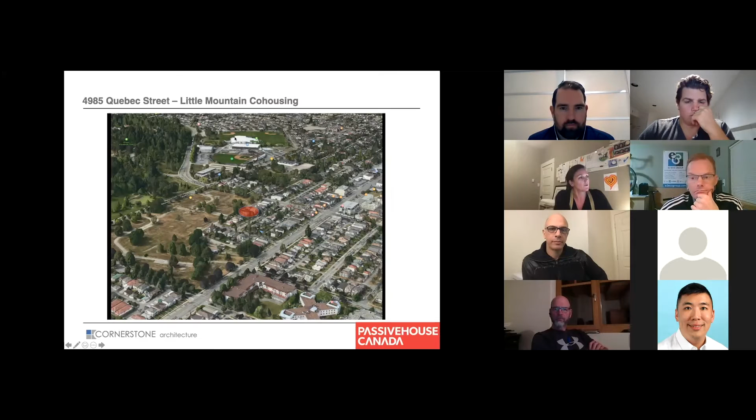Co-housing project. So Little Mountain co-housing is a passive house project, obviously 25 suites, large amenity spaces, a guest suite, and common workspace. Location in Vancouver is in the Little Mountain area, right there. Can you guys see my mouse? Okay, so you've got Main Street here, this is 33rd, and Quebec Street is right here. This is the Hillcrest Community Center, this is Queen Elizabeth Park. So that's the location.

So in terms of design, a few things influenced the design. I should probably say at this point that I cannot take credit for the actual design of the building. That was Scott Kennedy and Simon Richards from Cornerstone. They designed the building. I came in prior to stage two to, as I jokingly say, make this building a passive house, which is not entirely true.

Anyway, it's a co-housing project, which is not to be confused with co-op housing. Co-housing means you have owners that form the development company, and then they hire the consultants, architects, and the project manager to channel all, in this case, 25 owners, 50 people's wishes to build their own home. The other interesting part was, as we always know, design guidelines by the City of Vancouver don't always help the case of passive house. Setback requirements are not always helping, whereas we try to develop a compact building.

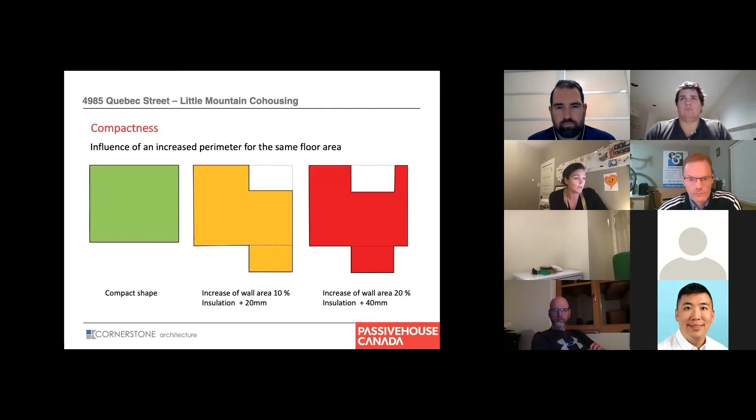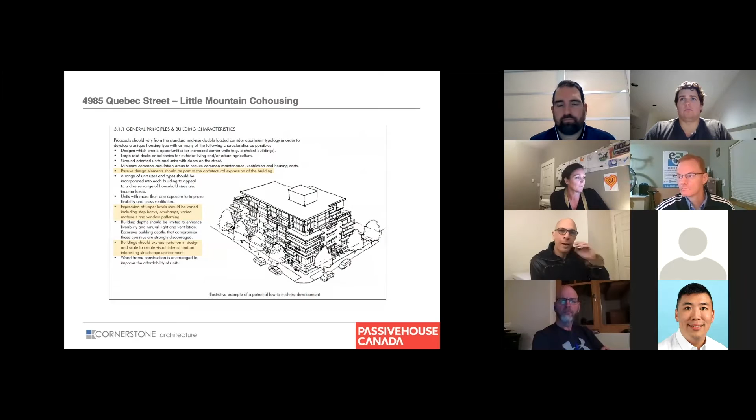So we've all seen this slide, so I'm not gonna talk too much about it, but it is somewhat important as we go further through the design process. We know as we go away from compactness, our building has more heat loss area in comparison to the floor area. Then there are rezoning policies. This entire Little Mountain area was rezoned to 6-story multi-residential buildings in wood frame construction to make it affordable. And then the typical design guidelines. The city called it the Main Street Character Design Guidelines, whatever that exactly means, but they're asking for setbacks and these kind of things.

So here's the site, schematic design site, building envelope. Let's go through this a bit quicker. And then we had the first concept section. Zoning asked for the units facing Quebec Street to have exterior access, so access to the street. So there was basically the idea of having townhouses on the bottom.

And what you always find in co-housing projects, as it is a community of people that comes together first, is they actually want common areas. They want areas where they can spend time together, but also have their own units. So every co-housing project has a so-called common house, which is a larger amenity space with a larger kitchen, not a commercial grade kitchen, but a big kitchen where they can all gather together. And we'll see later in the floor plans that there are other communal spaces in this building.

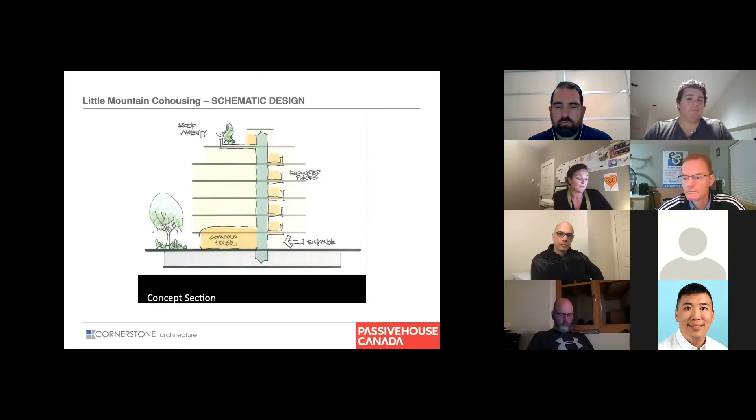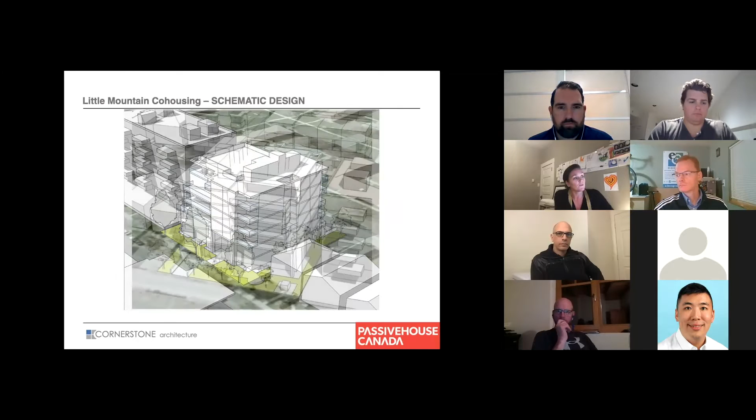So compact, 6 stories. So this was it. So from what I understood, there were two designs. Initially the design was fairly compact with a few setbacks here and there, which had to happen. But then, and this is from the back, there was this very strong wish by the community, and I'm going through this quicker, to actually create a communal backyard where as many units as possible have a visual connection to that area, right?

And so this is now the view from the lane. This was the view from the front. This is Quebec Street, view from the lane. And this is basically the way the building looks right now. This was still schematic design, but what we have here is a U-shaped building. So we did add quite a lot of heat loss surface, to speak in passive house terms, to make this desired building shape, which is working really well.

So you can see here, we have an exterior staircase, which you will see later, but we also have these exterior pathways on every single level. And those, including the balconies, allow this visual connection to this backyard. And down here, we've got this amenity room spilling out into the garden. Here's a kid's playroom going into the garden.

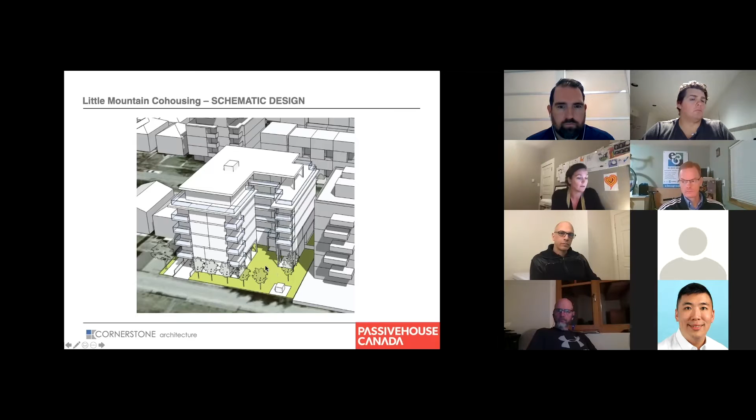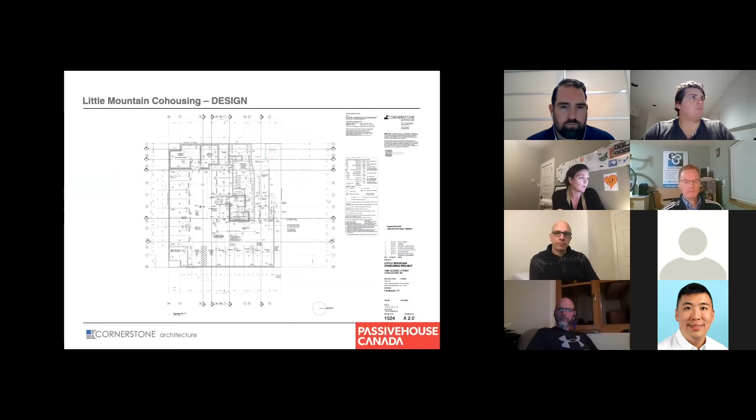So now this was the start of the schematic design. And this is how the building actually looks. So you can see here, that's the courtyard with the exterior staircase. I've got some floor plans that show that a bit better. So that's a site plan, not really important at this point. Parkade, obviously there's underground parking, which actually has a music room and a bike room in there also, different from normal developments, like a bike repair room. It's a workshop.

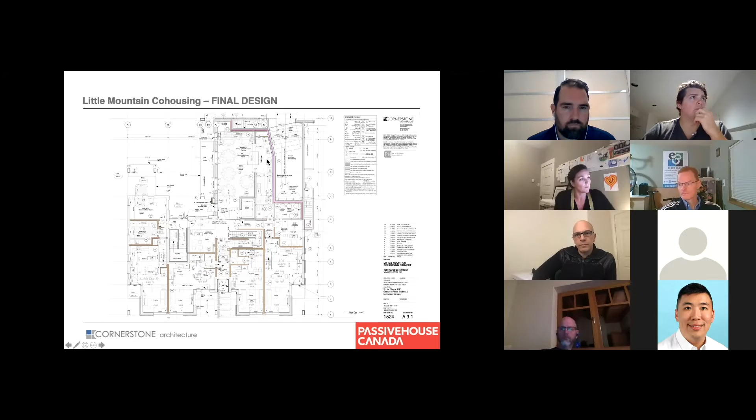And so now this is the main floor plan. You can see here, I hope it's visible or legible. This is the parkade entry. This is Quebec Street. So here's the main entry. You go in here, and then this is the very, very large amenity space with the large amenity kitchen, right? There is a communal washroom down here, mechanical, elevator, but then there is another amenity lounge. So this whole downstairs area is all communal, and this one goes out straight into this big garden area. Then you go through here, and this is our exterior staircase, right? So that goes all the way up to the roof deck.

And then you go back in here, and there's a communal laundry room. Even though all the units have their own in-suite laundry, they still wanted communal laundry as another option. And this is the children's playroom, again, with direct access to the outside here. These four ones here in the front, those are the four townhouses. They all have an entry from the street. And those are the only two units in this development that are actually 2 stories.

So as you go up, you can see here, these are the townhouses up here. This is a 1-bedroom suite. These are two 2-bedroom units. And I believe those ones are actually the only ones that are stacked all the way up. Everything else changes on every floor, somewhat slightly, but still it changes. So we have 25 units and 13 different layouts.

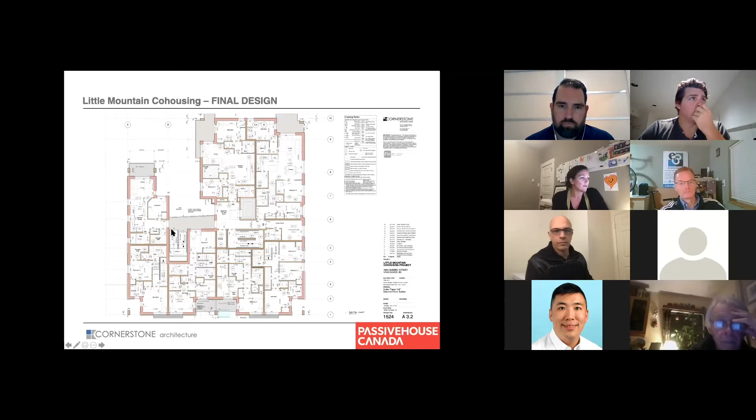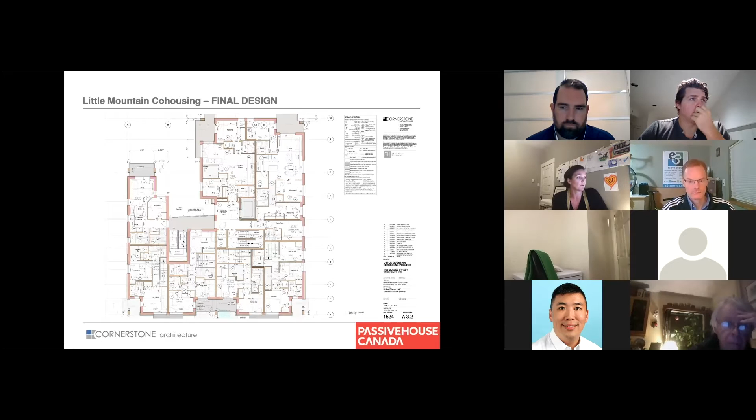Here you can see that exterior staircase and those connecting pathways on the exterior. So on one side, they enter into a unit, and on the other side, they actually enter into this hallway that then enters into the units on every single floor. So I go up, up, up. And this is where we're getting to the 6th level, where we have our setbacks, big open roof decks, another fairly large common room up here, so another amenity space.

Actually, I forgot to mention, on the lower levels down here, there is one space which is a guest suite that can be used by anyone who has guests over, with its own bathroom. And then on another level, there is another common room, which is a common workspace.

And this is the roof deck with garden beds. So the elevator goes all the way up, the staircases both go all the way up. So this staircase is actually entirely exterior. This one does not go down into the parkade, this one does, and so does the elevator. So this is basically the design of the building.

Now, what this did, and we need to emphasize that: you can see that the heat loss form factor on this building is 1.72, whereas a building like, let's say, the Heights, which is at Skeena, Cornerstone's first passive house building in Vancouver, probably the first passive house building in Vancouver in multi-residential, has a form factor of 1.12, which is fairly compact.

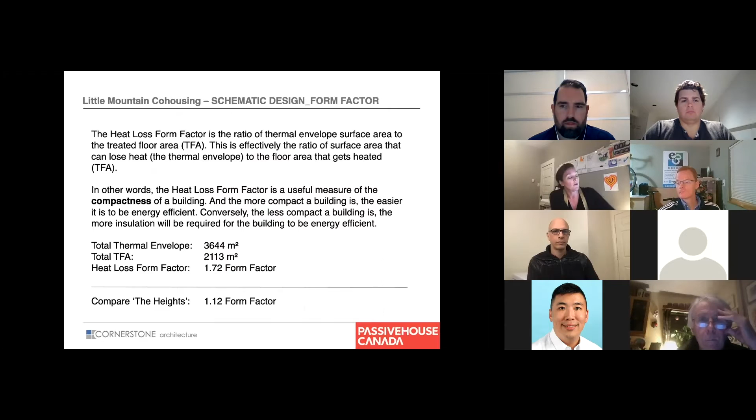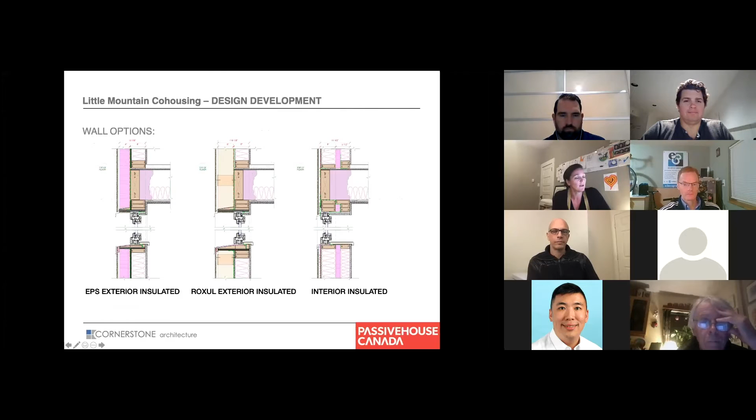So as we know, design of a continuous air barrier is a large challenge. So we looked at different wall types, and we basically looked at this and this, and this one is not ideal in building science terms. This one was too costly with the rock wool on the exterior, which right now we're looking at again for a different project, because lumber prices are so high that this one might actually be less expensive than the chosen one that we used for Little Mountain, which is this one. It is what we used on the Heights. But because of the form factor being different, the EPS layer had to be 1 inch thicker, which is quite a bit for the entire building.

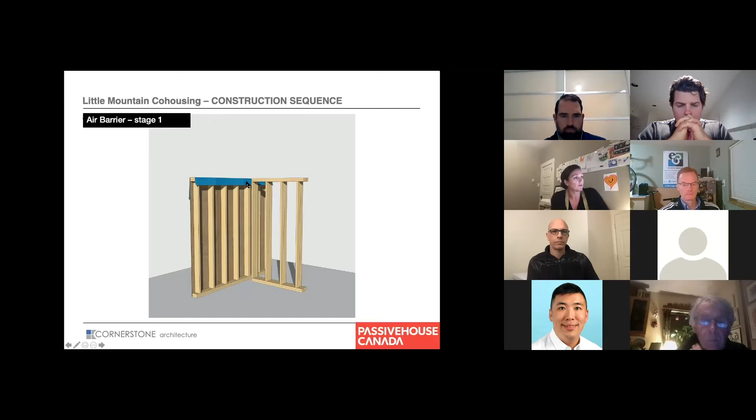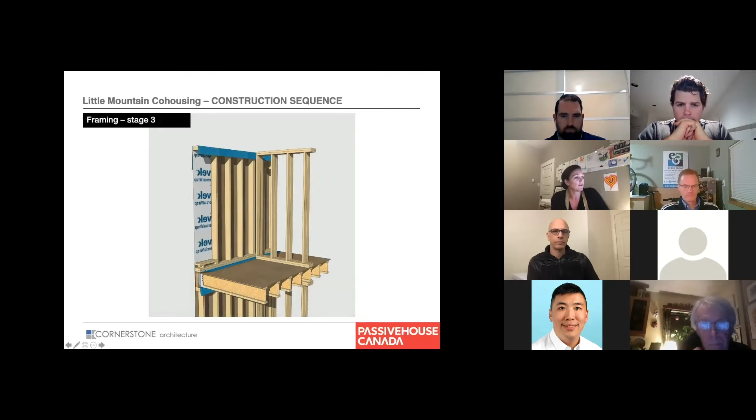Now this is the sequence. You can see here, exterior wall, interior wall. We left this part open when we put it together because we had to fill this in after, right? So that's how it was put together. Then there's the exterior, the membrane, we call that the floppy bit, the Tyvek that needs to go on first so we can wrap it around after, right? So here it comes up, and then there's the next one. Pretty straightforward building assembly. The windows came in.

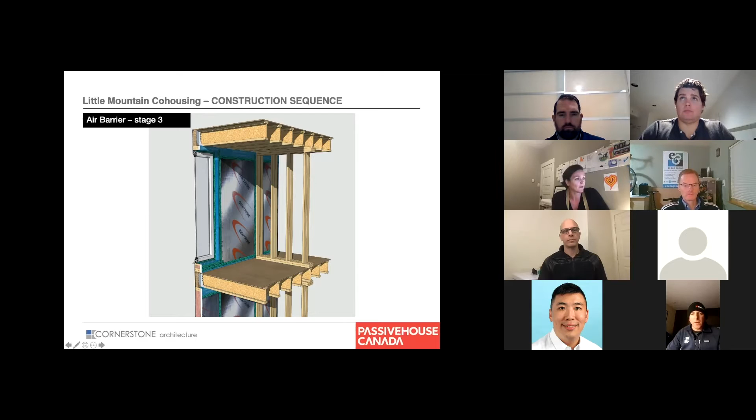Then we have our first layer of batt insulation. And now comes the Quick-Therm. And now here with the Quick-Therm, you can see it is actually taped. So the foil-faced part of the Quik-Therm insulation, taped, is our air and vapor barrier on this project. So it kind of connects to the Tyvek up here, and then the Tyvek goes around and ties back into the next wall up there on the next level. And then comes the service cavity after, which is filled with batt insulation again. These interior walls are partly filled just for sound insulation towards the rooms with the HRVs in them.

Then the other challenge we faced on this building was that because of its layout and its shape, there were some challenges to get it seismically and structurally stable. So we unfortunately ended up with quite a bit of additional concrete on the main floor. And that is right here. So initially all of this was wood frame construction. And then right after tender, we added some structural concrete here and also some more shear walls down here.

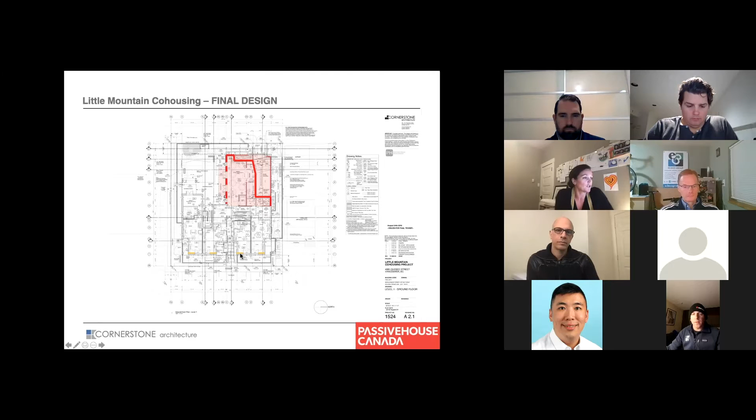So you can see, I thought I had some photos. Oh, there's something coming up, yeah. So actually, that was supposed to be somewhere else. I think I screwed that up. The order of the pictures is wrong. Doesn't matter, I can talk about it anyway.

So these were some typical details where we had to come up with a solution. This is what we did initially. And then you can see here, we cantilevered the wall type, or the frame wall, to make this insulation part just a bit continuous, right? And so we had Monoglass. This is the parkade. So we had Monoglass on the underside of the parkade, but we changed that after to this kind of assembly, so we added this little concrete upstand. And we lifted this one up a bit so that part is now our continuous insulation. So that made it easier for us to address those thermal bridges.

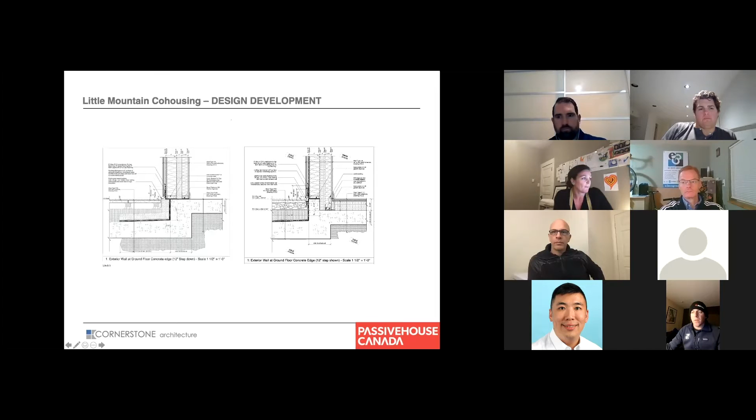We still kept the Monoglass, but instead of 10 inches here, it's now 5 inches there. So we basically sandwiched the floor, which helped with eliminating other thermal bridges like the columns in the parkade that would come up here somewhere. So with this continuous insulation on the upper part, we were able to address that nicely. You can see here how it's built now. This is on the outside of the main floor.

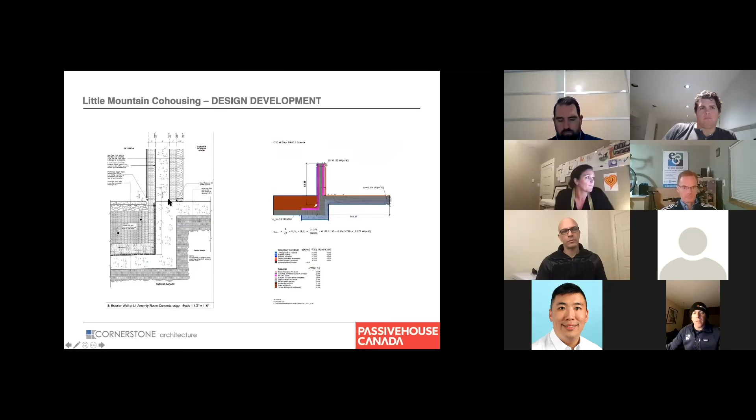This building has actually in the end been built as a prefab construction, which was not always clear from the beginning. Ideally, it's good to know when you actually do the construction documents and the drawings whether or not it's being built like this. So here's the same thing. This is the concrete wall now that was put in later that we had to address. So again, this was our initial design, and then we changed it to this one, which makes it better for eliminating thermal bridges.

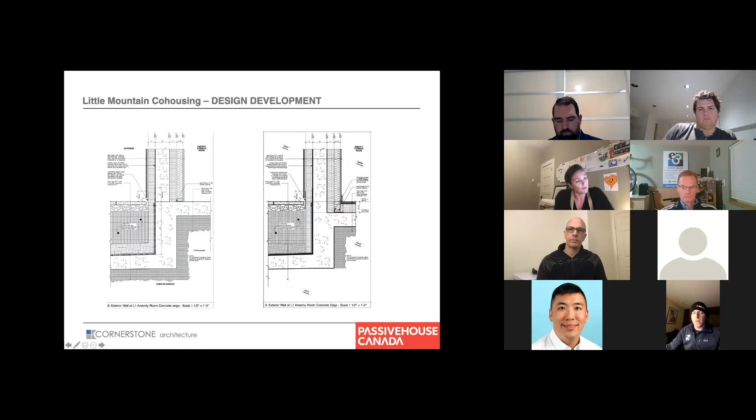Yeah, so here's our full-on concrete ground floor. It was one of the few buildings where, because it doesn't have a commercial component on the ground floor, it wasn't actually necessary to have it in concrete for fire rating reasons, but it ended up being concrete for structural reasons.

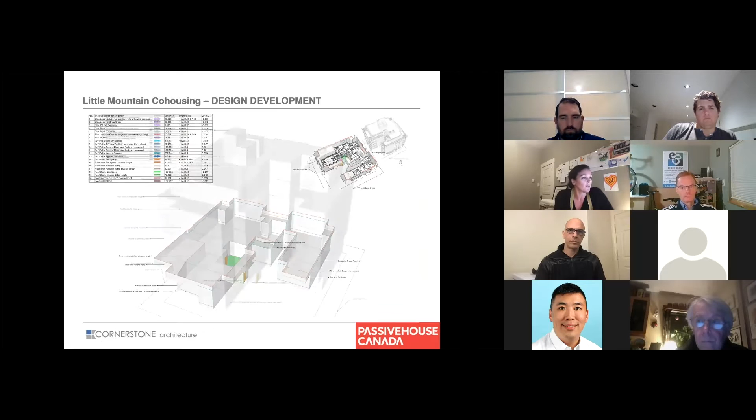Now, in terms of thermal bridging, I don't want to spend too much time on this, but obviously we all know that we ended up on this project with quite a few that had to be calculated, and Lindsay from our office did an awesome job on illustrating this and putting it into the PHPP right after.

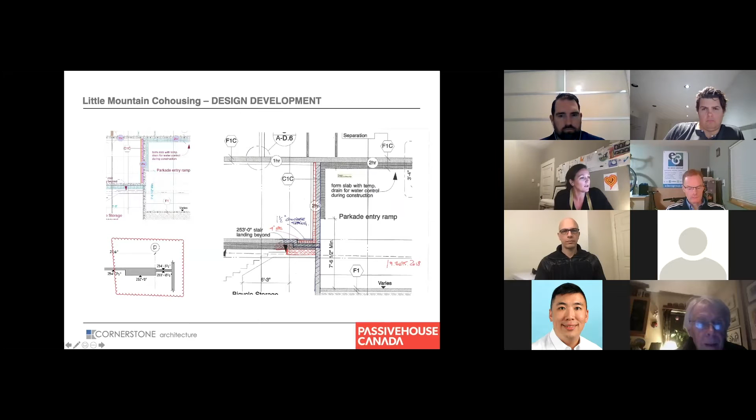And there are some other things here, thermal bridging. So I would say it's a fairly complicated building with a lot of details that needed a lot of attention. But as a pretty good team, we made it work, I believe.

So in terms of windows, the windows we started looking at initially in our model was Euroline, mainly because they are somewhat semi-local, being manufactured here with imported profiles, and we've used them on Skeena, so it seemed like a good idea. And then later on, we kind of decided for others.

So in terms of thermal bridges of installation, this is kind of the detail. Again, it's a fairly similar detail that we used on Skeena. And the reason here is, again, as most of us know, I saw who is in the audience, we all know the window ideally shouldn't be here, it should be here, right? Center line of the insulated wall.

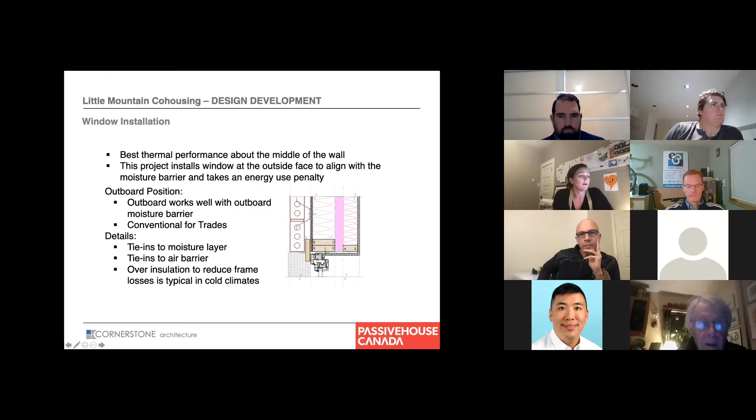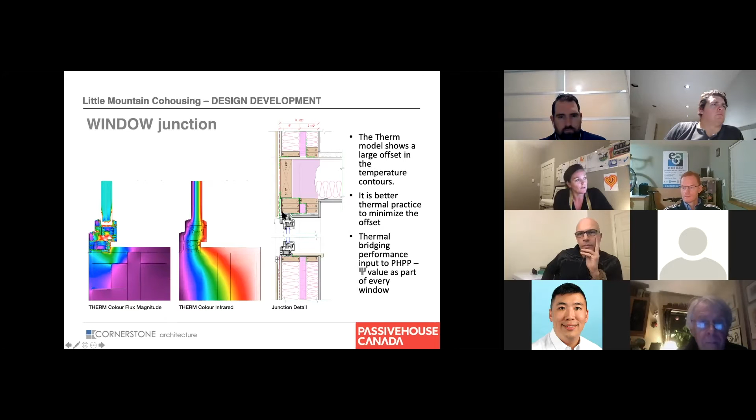Now, we were able, I can use this one too, we were able to make the model work having it here. And what this did, you can tell, achieving the airtightness out here was so much easier than having the window set back. Yeah, so these are our actual details that we ended up using. They have a little bit of an inset here to have the interior shading.

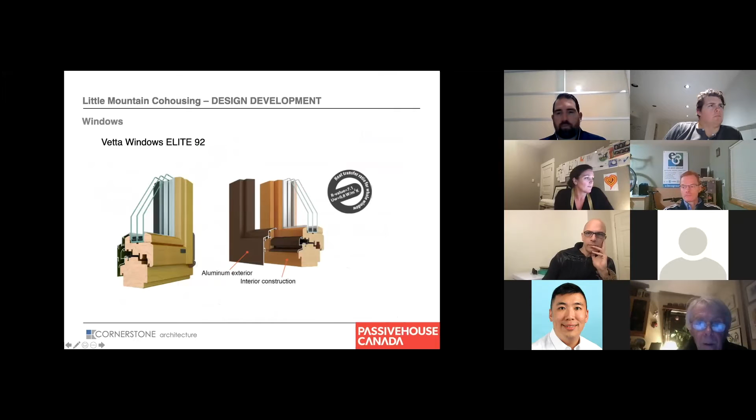I'm going to flip through this a bit faster because it's really not that interesting right now. These are the windows we ended up using, not Passive House certified windows, but as we all know, they don't have to be certified. They did provide all the parameters that we required for this project. And they are wood on the inside and aluminum on the outside, which is a fairly nice feel. And they were price competitive, and they are installed now, and they're quite beautiful.

So in terms of the ventilation system, and this is where it gets more interesting again, we are using Zehnder ComfoAir 200s, one per apartment. Because it's a condo building after all, every single unit is owned, it's not a rental building. We decided to go with a decentralized system for the units, so they all have their own ComfoAir 200s, which again now becomes interesting when we think about prepping the building for the airtightness test.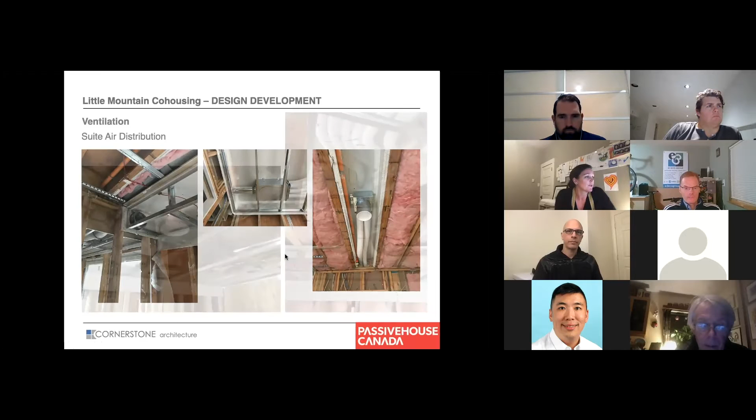So you can see here the components. This is the silencer. Sorry, I don't want to spend too much time on this. I just feel that most of you know these components by now, and we really wanted to talk about airtightness. So maybe this is an interesting one.

We're using this exhaust and intake grille for our units. So you see those on the exterior of the building. We're using these ones for the common rooms. I think we have one ComfoAir 350 and two 550s for the common rooms. These are the HRV layout plans that we actually did.

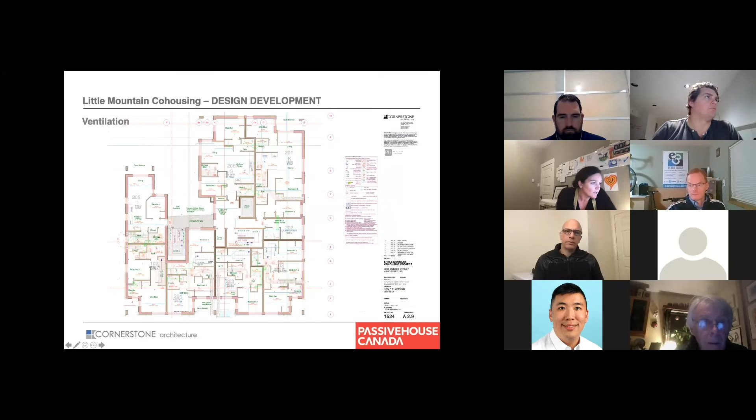So we did the HRV layout plans, and I think I've zoomed into some here. So we produced those, basically figuring out in which cases, and we coordinated that with the structural plans. So there are some with dropped ceilings, and the dropped ceilings are lower here because the HRV needs more clearance than the other dropped ceilings. But then we also have areas where we don't need dropped ceilings because we're running those in the joist spaces.

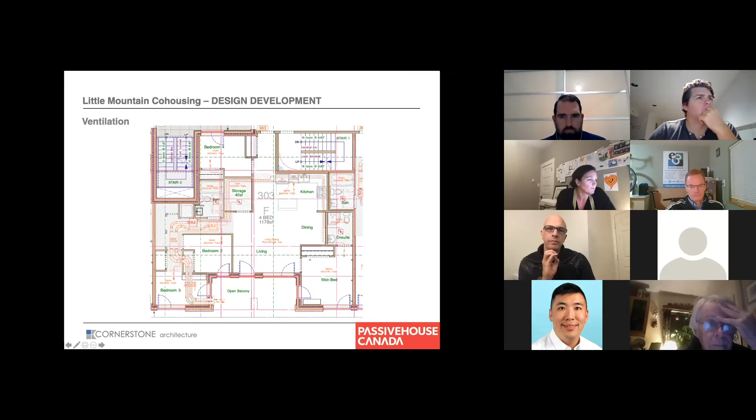This is the intake and exhaust, HRV here, silencers here, and then we basically ended up drawing all these little ComfoTubes to the intake and exhaust in the rooms. You can see that here. Here's another one. So we did that for every single unit. There was a bit of coordination, especially with structural, but it worked out well, I would say.

Yeah, so these are our ventilation plans. It goes up. Yeah.

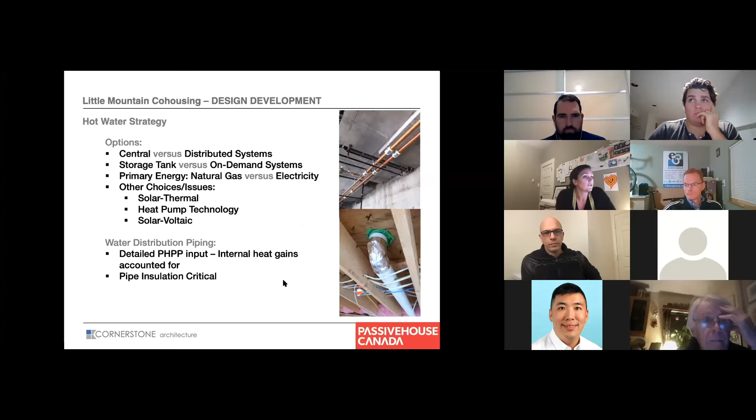And then domestic hot water on this project, we did a bit of investigation into different kinds of strategies, but then we ended up using 4 Sanden heat pumps on this project. Initially with an electrical backup, but then at some point we felt confident enough that we don't need the electrical backup tank. So this is how the hot water is generated.

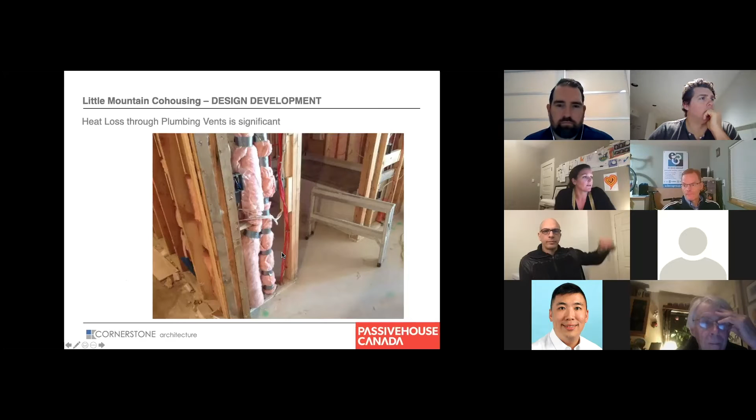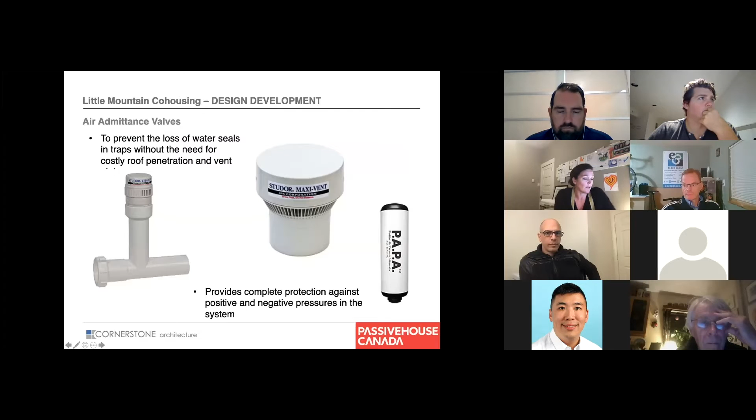The other thing we investigated and almost got approved, we did get it approved, then it was revoked, was air admittance valves on this project and the PAPAs, which are the, oh God, I forgot what it's actually spelled out, pressure attenuators that go together with the AAVs. And that is basically to reduce the heat loss through the plumbing vents, right? It is quite substantial. And so the idea was to use AAVs everywhere in the building and basically not have any roof penetration for the vent stacks, which is common practice in other parts of the world, but hasn't totally been approved here yet, other than for island sinks.

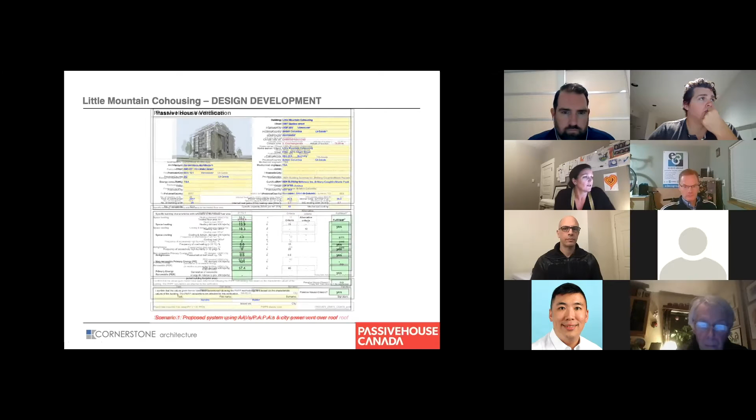So what we were asked to do by the city is basically recreate scenarios where we would use what we wanted to use. And you can see with the AAVs, we were at 13.9 heating demand. Without them, we were at 16.3. And then they asked us, what would it do to your wall assembly if you wanted to achieve the 13.9 without the AAVs? So it turns out we had to add another 5 inches of additional EPS, which obviously wasn't an option.

And this was the other thing they asked us to do: show us what would happen to your roof deck, which was planned with the plumbing stacks coming through. So it would have looked a bit like Swiss cheese, because these would have been all the spots where the plumbing stacks would have come out.

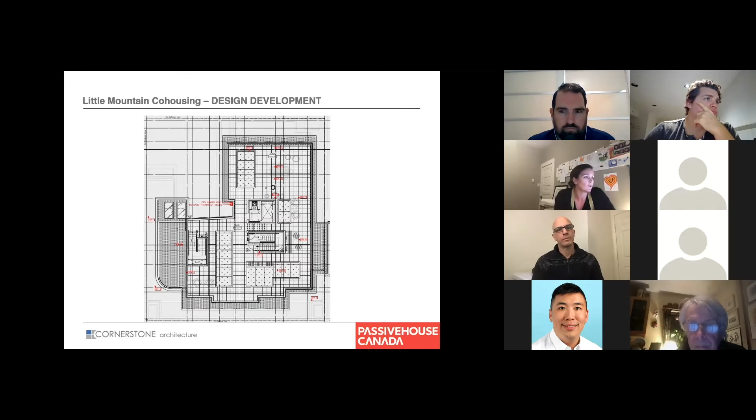Long story short, initially they said, yeah, we could do that, but then there were some second thoughts, and then what we ended up doing was, I don't know, there's a slide of this. We actually ended up having...

Okay, Troy, don't mind. What the fuck? What's happening? All good? Okay.

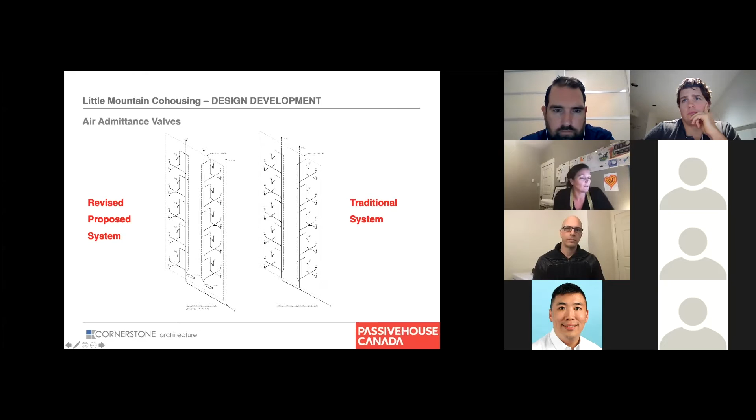Air admittance valve. So plumbing stacks bundled into 4 penetrations, and we now have the air admittance valves 1 meter over the rooftop outside, which basically still kind of stops the continuous heat flow. Yeah. And now this is where it all ties back together, and I think we're almost at the end. This is where our current PHPP sits, which is why our airtightness test is so important to turn out good.

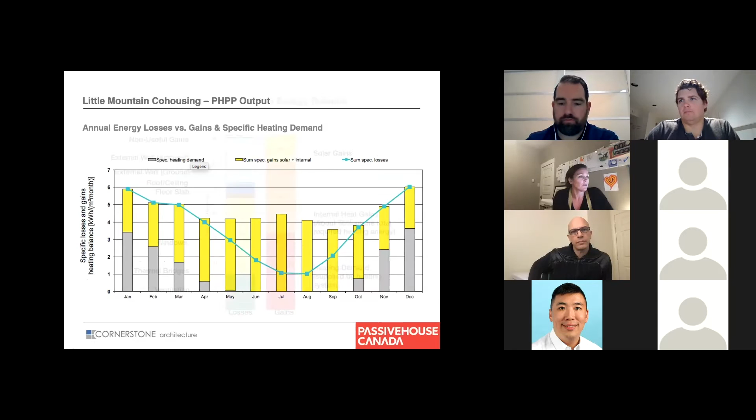Yeah, I think that's basically it. We used designPH to actually model the building, and I think, unless there are any more questions, that's it for the intro of the building itself. I'm happy to share more construction photos later, but I think that can come up during the discussion if required.

I'd love to know the reason, Chris, Sandra, why all of a sudden at the last minute the city kind of revoked their AAV approval. Like what specifically? Yeah, sure, there were some further discussions they didn't feel quite comfortable with. It's all about, from what I understood, life safety, right? And so there was a bit of a concern that if those AAVs fail, and nobody ever heard that an AAV fails, that ventilation would not be working properly, right?

And so it's kind of, whereas I feel with a continuous ventilation system going, the concern wasn't totally valid, but they muted you again, so we can't have that discussion with you right now, but I'm gonna share my screen, and then we should watch that movie first. I muted myself. Oh, you did?

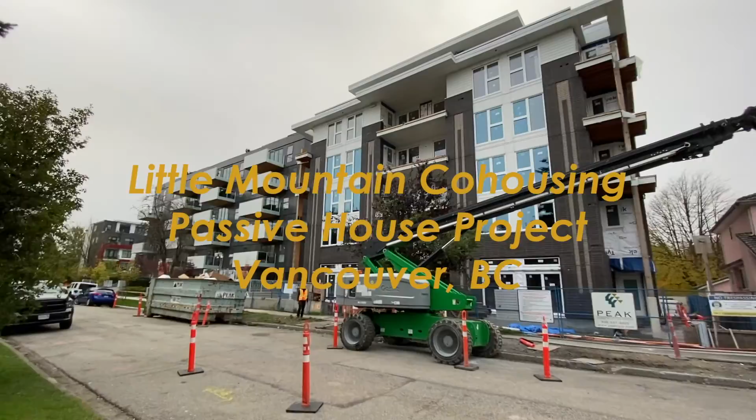Hello everyone. My name is Sandra Roller. I'm with Cornerstone Architecture, and we are here today with E3 Eco Group to do our pre-air tightness walkthrough on our Little Mountain co-housing project in Vancouver. We will talk a bit about the building, but we'll mainly talk about different approaches of how to prepare the building for the air tightness test. With that, I'll hand it over to Aina at E3 Eco Group.

Great, thanks Sandra, thanks for having us out. Travis and I are from E3 Eco Group, and we were asked by Sandra to come down and talk a bit about this building in terms of how the air tightness test is going to happen on it. So Travis and I are going to talk about two categories of preparation. One, the building as a whole, and then there's an extra added element to this particular building because there are some separate units that have their own exterior entrances. So not every part of this building is interconnected, which will add some complication. It's a good example of how the building gets prepped.

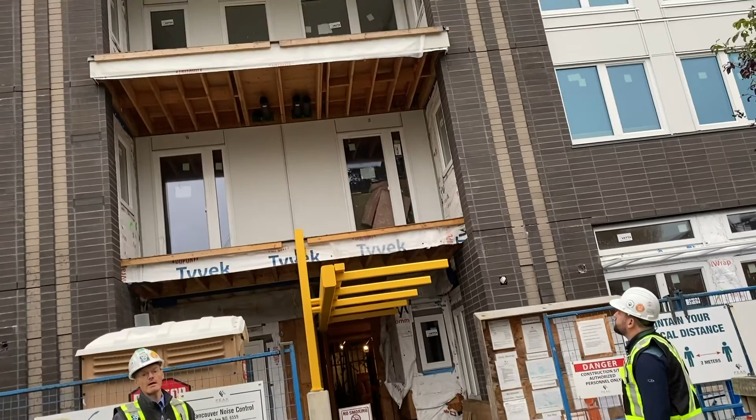So while we're outside, let's talk a little bit about the overall concept. You can see the building in the background. The purpose of the air tightness test is to find out how airtight the building envelope is, so we want to be able to test the envelope as a whole. That relates back to the complications with these separate units and separate entrances. We're going to test this building with our blower fan equipment that probably everyone watching has seen, at least for a house. Same approach, but with multiple fans. You might need 2, 3, maybe even 4 fans, depending on the leakage numbers. Obviously, this being a passive house building, we should need fewer fans than a typical building. So we'll talk about the overall building prep, and then go inside and talk about how we prep the units that have exterior entrances.

Okay, so this is a passive house building, so we'll be testing it in accordance with EN 13829, which is the passive house testing standard. We're going to locate a blower fan at the entranceway of this doorway behind us, and we're going to be depressurizing and pressurizing this building to at least 50 pascals, and after that we'll take the results of both tests, put them together and get an average, and we'll be targeting a total of 0.6 ACH, which is air changes per hour.

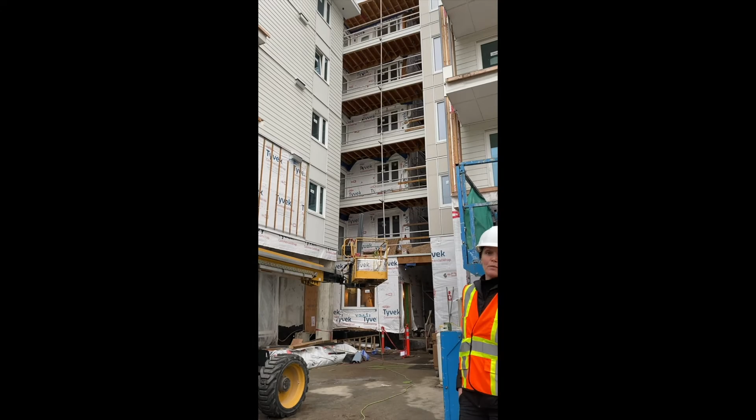We kind of look at the building prep and the whole testing process kind of like painting. It's a lot of prep work, and the actual testing really comes down to maybe half a day's worth of work. You might have 2 or 3 days worth of work to prepare the building ahead of time. So that's a little bit of the situation from the outside. It's all about testing the envelope and not including the dedicated ventilation or other air ducts that go through the building. So those have to be addressed, those have to be sealed up, and also making sure we're testing to the right standard.

So as Anna just stated, ideally we are air testing the building as one volume. One challenge with this design is that we have those exterior walkways accessing every level, and we have an exterior staircase. So that leads to the fact that our building is actually not one volume, and we have discussed a few different approaches.

Based on the design of the building, as Sandra said, it's not all one interconnected volume. That is the ideal case for us to test the building. We would want to be able to test the entire envelope in one test without having to separate different things, because that introduces the potential for error. However, this building is not one interconnected space.

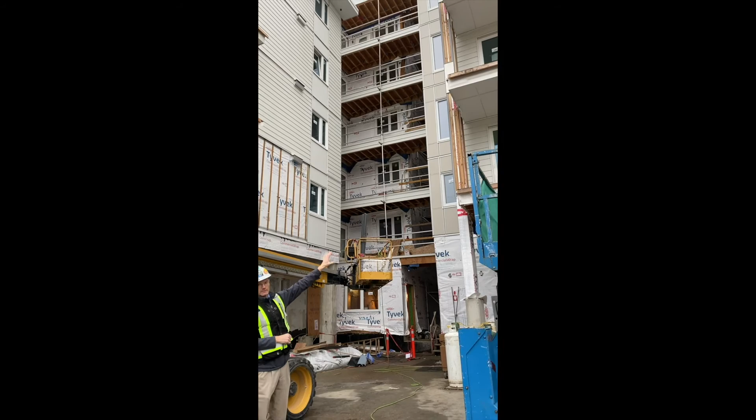As Sandra said, this bank over here, these are separate levels of different units that have their own exterior entrance off of these balconies you can see in the background. So these units have a separate entrance, and they are not internally connected to the rest of the volume of the building. We can test all this volume of building over here on the left, but we can't automatically include these units over here on the right.

So a couple of different options that we've come up with. We had some of our own ideas, and the site staff, actually the builder, had another option as well. So there's three potential ways it could be done. One way is we could test the large volume over here on the left, as we normally would, and get the result there. And then we could put a fan in each of these individual units and test them separately, and then add up all the results together. The challenge with that is there probably will be some leakage through the party walls and through the demising floors, because they're typically not perfectly airtight.

So if we tested everything separately, added all the numbers together, we'd probably overestimate the envelope leakage. So we could do a variation of that. We could bring enough fans, put a fan in all the separate units, run them all simultaneously, and then that would pressure balance the party walls and the demising floors, and we'd probably get a better result there. But having all these fans running, we need something like 6 or 7 fans all working together. That's not a perfect solution either, because there'll be some errors introduced with that.

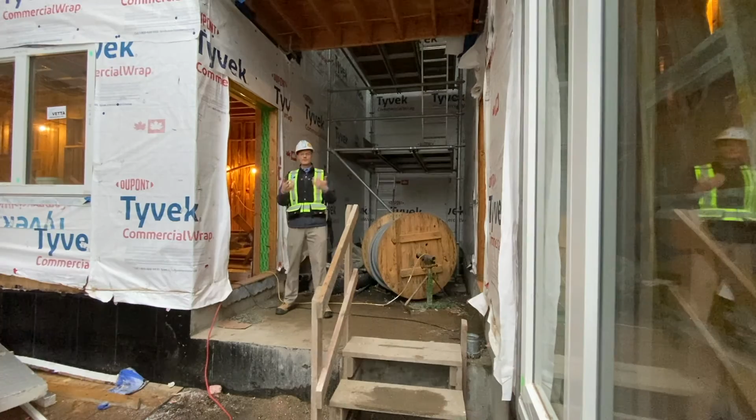So here we are, a little close-up view of the challenge we just talked about a minute ago. So over here, this is the main part of the building. All these units and these levels are all interconnected. This is easy for us to pressurize and depressurize with our equipment. The challenge here is this unit. This doorway leads into a separate unit. There's a party wall running into the building over here. So this big part of the building is not connected inside to this unit here. But we want to test all those spaces together.

So one of the options we had talked about is literally running some ductwork between this doorway here and this doorway to connect the spaces. So you can imagine ductwork running through here. We have a large diameter flex duct that could be used for that. We would seal up both doorways with either plywood with a hole cut in for the ductwork, or we'd use some of our extra blower fan equipment. That is a potential way for us to pressurize and depressurize this part of the building and include the air leakage through that connecting ductwork for this space. So again, it's an option, to try and make sure we capture with the same test what's going on there for leakage as we capture this part of the leakage here.

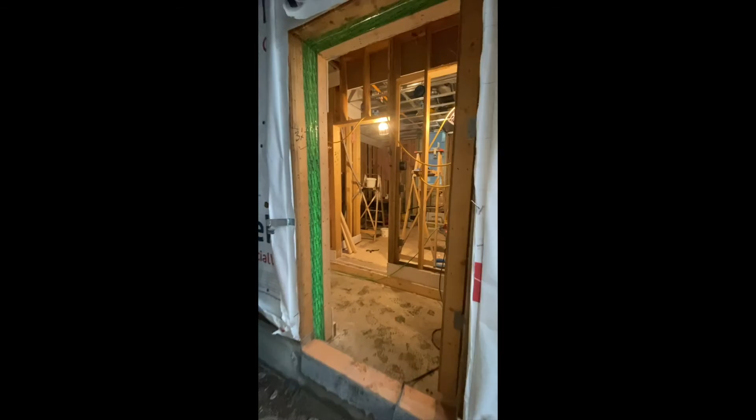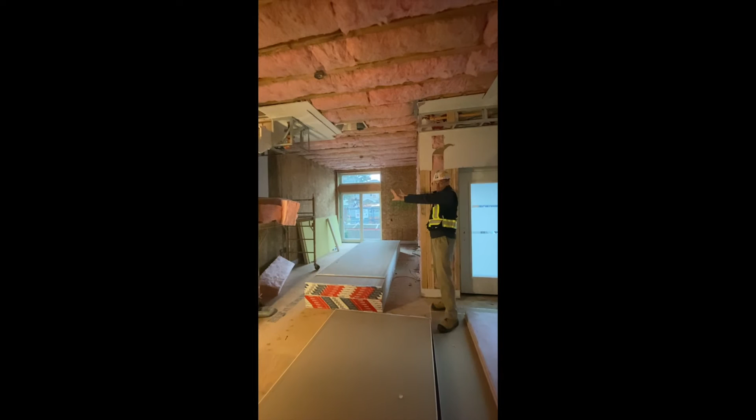Down here. So now we're inside this ground floor unit that is separated from the rest of the building. You kind of get a bit of a sense with the camera walking in the unit. You can see the party wall over there. In this case, it's a shear wall, so it adds a little bit more complication to it in terms of an air pass through. But you can also see from this perspective that this space is not connected to the

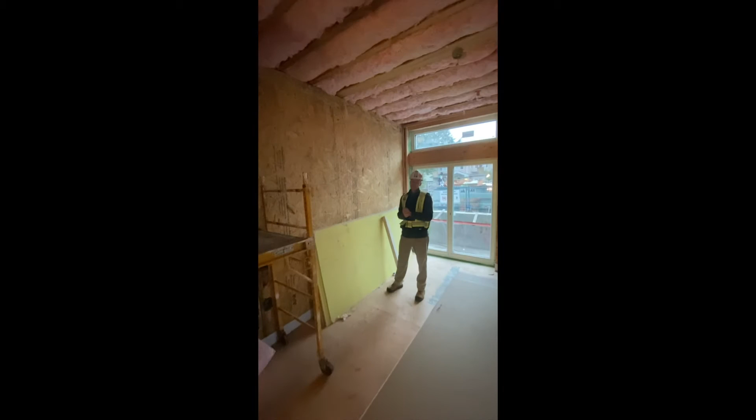rest of the building. Okay, so again, our suggestion is to literally ask the site crews to cut a hole in here, and size-wise, it has to be big enough just to make sure that air can be easily drawn out of this unit into the rest of the building. The rest of the building is just on the other side of this party wall here.

So we're thinking it's going to be something like a 2-foot by 2-foot hole, which is actually a pretty good size hole, but we're thinking roughly that size so that there's more than adequate air flowing out of here, and it won't cause any negative effects to our testing.

And again, the purpose for going to that length, if you will, of cutting some temporary holes in the party walls is so we have the best chance to get the whole building airtightness number correct. Particularly important because this is a passive house, so we all know it's got to be super tight. We don't want to risk any testing procedure that might give inaccurate results, especially if those results add to the

air tightness. So here's an example of one of those party walls. We might look at some others later in the building here, where we're literally envisioning a roughly 2-foot by 2-foot hole here, so air can pass through from this unit into the rest of the building to make sure everything

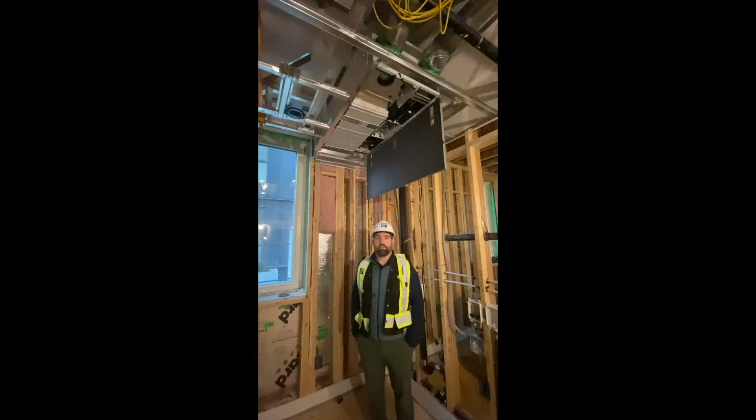gets tested all together. Okay, we have an in-suite HRV ventilation system here. So we have a Zehnder system here. So what Ina had mentioned at the start, there's options to seal these. These will have to be sealed during the testing procedure. So there's 3 sort of ways we can seal this sort of system.

The first, which I had mentioned, was sealing from the exterior vents. So in these systems, they have an intake and an exhaust port, which comes to the exterior of the building. So this would be our primary option for sealing: to seal on the exterior of the building at the weatherproof cowls there.

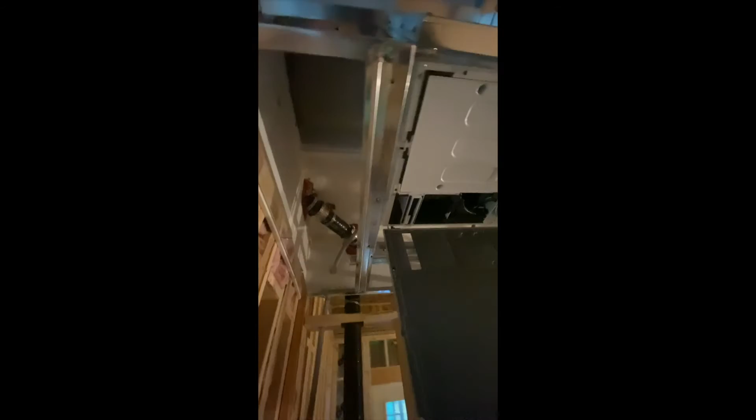The second option to that would be actually sealing on the inside or on the intake of the HRV system itself. So in here you can see the ductwork is actually exposed here. You could actually seal those from the exterior of the HRV or on the inside there. And then thirdly, we would actually be looking at following this ductwork down and sealing from the grill terminal itself, on the face of the grill terminal.

Now, the pros and cons of this sort of style of sealing is if we were to seal at the face of the grill here, we can introduce any of the duct leakage that occurs in the duct run back to the exterior of the building. So for that reason, we always recommend sealing at the exterior of the building as a primary technique to seal an HRV ventilation system.

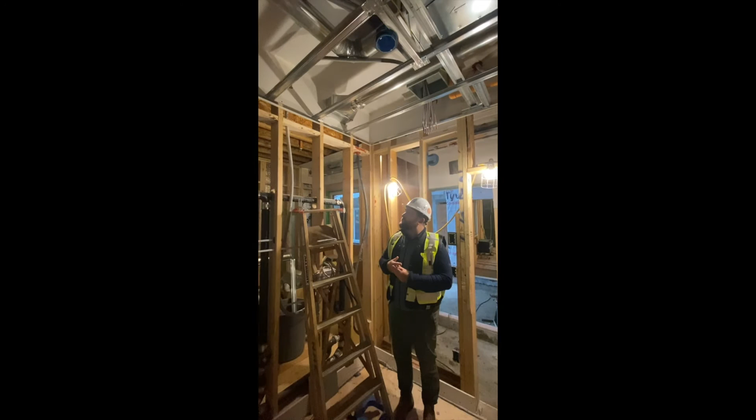Okay, here we have the below grade vestibule. So behind us here we have the parkade, and I have the elevator shaft behind myself here. So at this location here, we're actually going to have a passive house door sealing off. So at the time of testing, this area behind me will actually be included in the building volume that we're

testing. So this space behind this door will be unconditioned space, and this space here will actually be conditioned from a rooftop HRV hallway pressurization system. So what does that mean for the purpose of testing? At the time of testing, obviously this door that's going to be located here will have to be closed and sealed. The elevator shaft behind me here would have to make sure that any sumps or drains at the bottom of the elevator shaft will need to be primed to make sure that they are fully sealed.

And then when we go up the elevator shaft to the rooftop, we want to make sure that HRV system servicing the vestibule and any of the hallways throughout the building is also sealed. And again, we want to seal that primarily from the exterior vents on the intakes and exhaust ports for the

HRV system. Okay, so as we mentioned below in the below grade vestibule area there, we had a rooftop HRV unit which is going to be servicing the entire building to provide hallway pressurization. This is one of the grill outlets for that mechanical duct riser here.

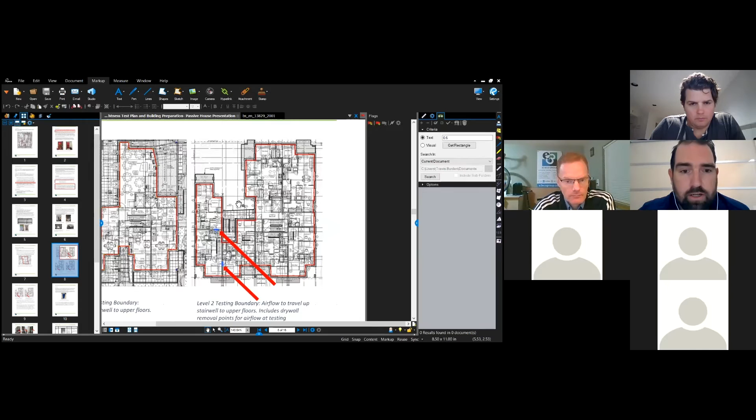So what our problem was when we were looking at setting up our fans and interconnecting all of the spaces in the building so we can run the test as one, is that there are these partition walls on the second floor, and then as we go up through the building, this space over here is completely separated from this space here with no interconnecting spaces or doorways or any hallways or anything. There's only this external staircase which runs up the building with 2 door entryways here.

So the three sort of options that we explored throughout this were, firstly, which was a suggestion that we had from the construction team, to actually set up a blower door frame in each of these door frames here, and then have a piece of expandable, flexible ductwork connecting each walkway between each suite. So there'd be 5 or 6 of these running up on each level as we go up the building.

And this option is totally viable, but again, the problem with this is the amount of door frames that we'd have to set up and the amount of ductwork that's introduced can introduce a lot of unintended air leakage into the test results. So for this reason, we recommended against this option.

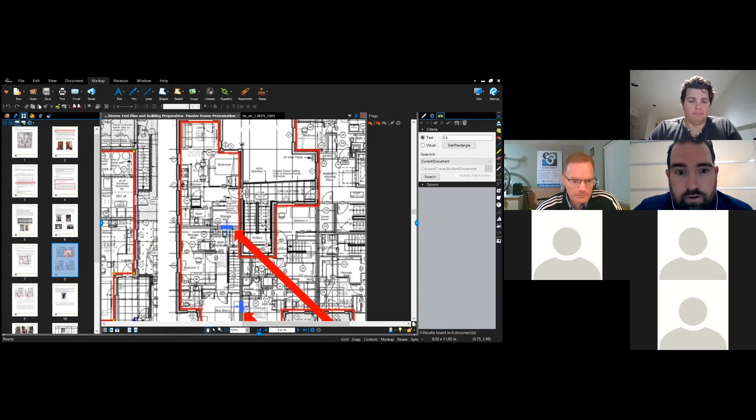The second option, which Ina mentioned, was literally running individual fans for each of these areas. So we'd have a fan in this doorway here. We would have one fan on the entranceway here, which would actually carry through the whole large area of the building all the way up through the stairwells and elevator shafts to the top floor. But we'd have to have individual fans for each of the spaces here on every single floor. So you're talking 5 to 6 fans with a test running all of those pieces of equipment simultaneously.

And again, it can introduce errors or additional leakage into our tests; it can add extra infiltration into our test that we don't really want to account for between the demising walls. So that's why our primary option, which was sort of laid out here, was to cut in some penetrations through the drywall here to create continuous air paths for the fan pressurization and depressurization to travel through the building.

So I'll add in a comment there if I could, Travis. Yeah, please. About the second option you just described of having a separate fan in each of those separate spaces and running them all together. Probably at least some of you have heard of that before, doing pressure balance testing. And so we found the theory is great, but in reality, the practice doesn't work perfectly.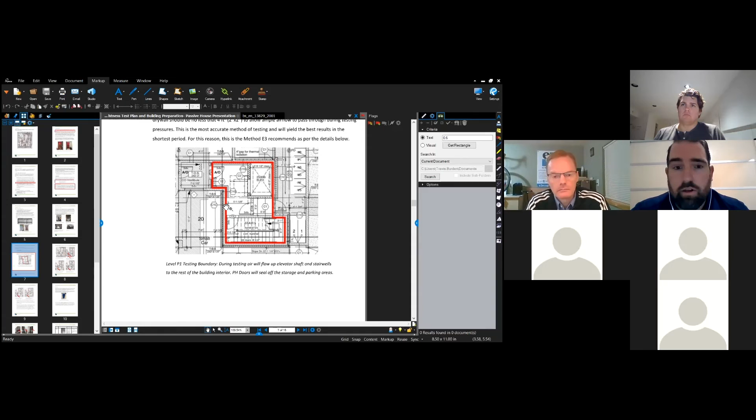And then for this building, for the hallway pressurization, it has a rooftop ERV system servicing the entire building. Airflow for that would be coming through the elevator shaft, stairwells, everywhere through the lobbies and every single floor. So that's an additional piece of shared mechanical equipment that would need to be sealed,

as well as the in-suite individual ERV systems. So when we work our way out the building, we expect that airflow to come up through the stairwells here. We've created proposed locations for the airflow to travel through the demising walls here and into each suite. We want the pressure in each suite and throughout the building to be relatively equal at the point of testing.

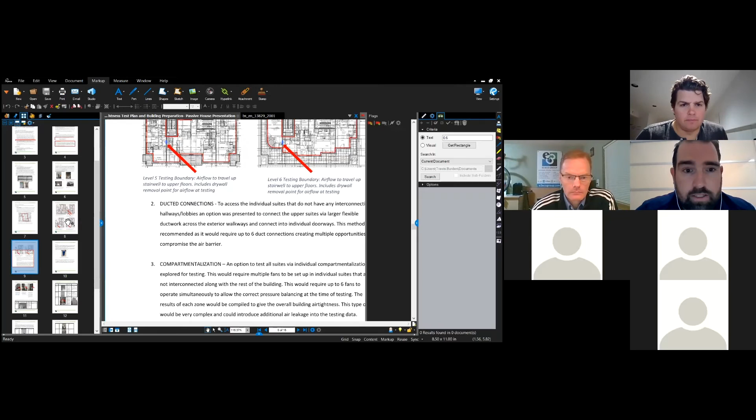So in order to get the building ready for the day of testing, we have to prep the building. I don't know if we mentioned this in the actual part of the video, but what we certainly look to do is to include the construction staff and additionally the mechanical contractor for the purposes of sealing.

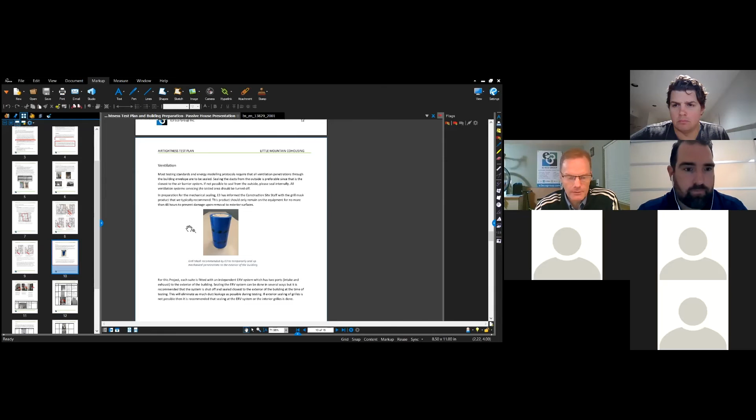I think it's very... Sorry, let me interrupt for a second. Yeah. I'm assuming everybody sees the same thing I'm seeing. Would you mind closing your display on the left and right and zoom in on the body of the report here, please? I think it'll be easier to follow. I'm also noticing there's a delay between when you move your cursor around and when we see it. So that's challenging to follow. So just be mindful of that, so we can follow what you're saying a bit better, please. Thank you. Yeah, absolutely. Thanks.

So, okay, I'll move down to this portion of the test here. So this is, like I mentioned before, about creating a pathway for the air to travel throughout the building. For the purpose of the testing, we need to make sure that all the interconnected spaces are open, doors are propped open, and future locations for passive house doors in that below grade vestibule area are going to be closed so that they're excluding any unconditioned spaces.

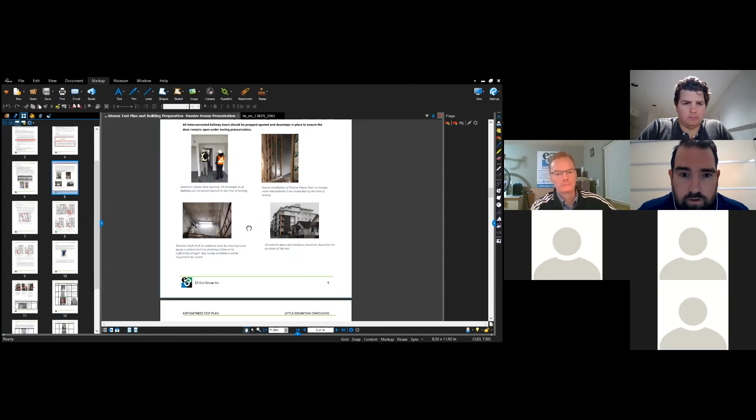The elevator shaft is closed at the bottom and sealed. Any penetrations going through that need to be sealed. And then obviously any external doors and windows would have to be sealed as well.

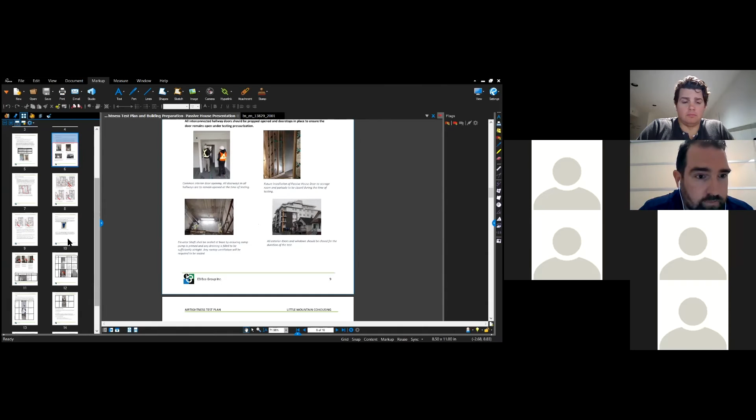Totally closed and latched for the purpose of the test. So when we look at sealing some of the equipment, one of the primary pieces of equipment we're looking at here is the in-suite ERV systems. So they're using a Zehnder in-suite ERV system, which, as Sandra pointed out earlier, has some external ports which go to the exterior of the building with an intake and a supply.

So there's several different ways we can seal this system up, and there's a primary way that we always recommend, and then if that's not possible, then we have other options. So the primary way that we would recommend sealing a mechanical system of this sort would be to seal from the exterior of the building. So this means the exhaust and supply ports that Ina had at the beginning of the video on the underside here, or on the exterior of the building here.

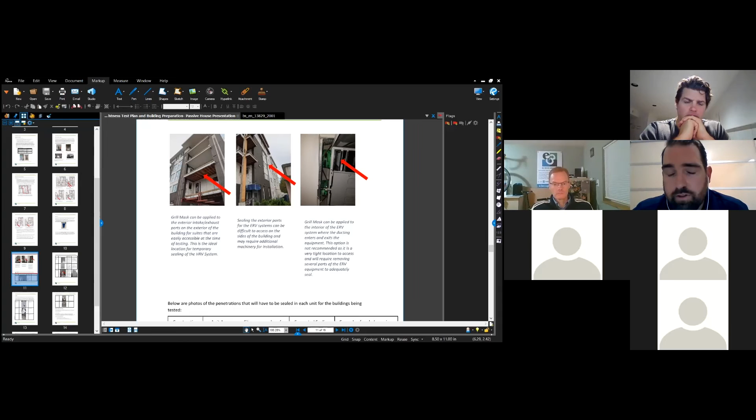And then a secondary option would be sealing at the ERV itself, so on the intake or exhaust ports. And then finally, if neither of those were an option, you could certainly seal at the actual register or grill itself. Now, the problem is when you seal at the grill or register itself, you can introduce additional duct leakage into the air leakage testing. So for this reason, we always recommend primarily to seal from the exterior of the building. So you're not introducing any additional leakage through the ducting itself. You're only including the leakage through the building envelope.

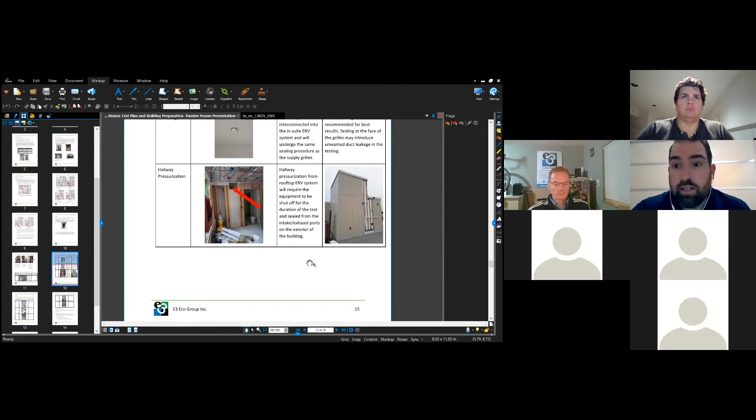The closer you seal to the exterior of the building, obviously, the less chance we have of including any of that into the testing. A good example of this is the hallway pressurization, which will be stored in this rooftop mechanical room here. We'll have an ERV located in here, which will be servicing all of the hallway pressurization ducting. So you could certainly seal this at every single duct terminal, but it makes more sense to seal this at the exterior ports, which will be located in here. And that's going to eliminate any of that additional duct leakage that we could potentially see throughout the entire length of those big long duct runs throughout the entire building.

I'll make a quick comment there if I could. So you might hear the mechanical contractor or the builder say, well, wait a minute, we seal up all that ductwork, it's super tight, we tape, mastic, everything. We totally understand that the ductwork is going to be at least fairly snug, but Travis's suggestion and the caution that we've learned is the more our testing boundary includes the interior ductwork, depending on where the sealing is done, the more potential for that leakage.

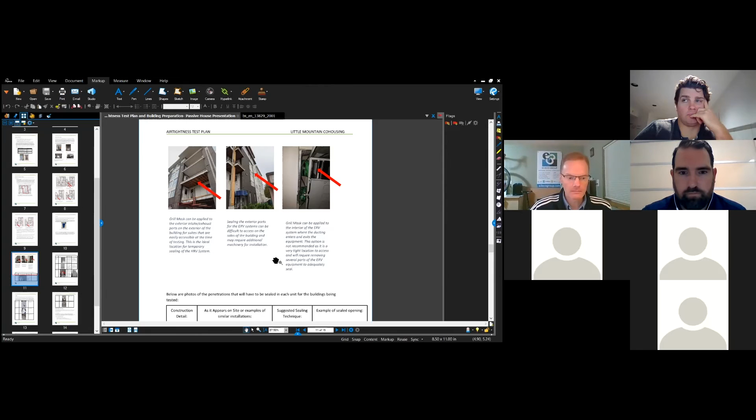And as much as people say or feel that their ductwork is completely airtight, the reality is that it never is. And you know that as soon as you start doing some duct leakage testing, which we certainly have done. So it's just a precaution, particularly for a building like this. We know that it has to meet a very aggressive air tightness target. So we want to make sure we test in a way that gives the best chance for success. And Travis will quickly explain that you can't always practically seal it from the actual location of the air barrier, but if you can seal right up against the air barrier system, that would be ideal. Yes, absolutely. Thanks, Joanna.

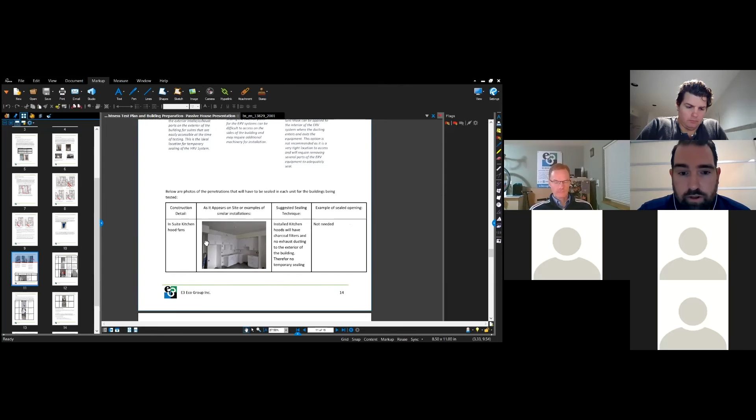Some of the other items that we would typically seal in a suite in a building that's not a passive house building would be other exhaust penetrations, such as kitchen hoods or dryer vents. So these are items that are typically on our list of items to seal, mechanical ducted items. But for the appliances in a passive house building, we're using charcoal filters in the kitchens, we're using condensing dryers, everything's ductless to the exterior of the building. So we're not having to worry about sealing any of the extra equipment, which is always nice to reduce the list. However, we still have to make sure we seal things like plumbing, any P-traps, stuff like that. They have to make sure that these are primed, because we can get airflow coming through.

And any floor drains that were happening in any mechanical rooms or anything like that are part of the testing area, testing boundary. We certainly want to make sure that those are primed also, so we're not introducing any additional air leakage into the system.

So typically, I guess I could talk a little bit about the testing procedure itself. Something like this documentation is standard for E3 to produce for every test that we do. But leading up to this, we would actually have several meetings with the consulting team to discuss the air barrier or how the building is constructed, looking at the construction schedule.

And then we would plan a site visit for myself or Ina or some of our field technicians to come out on site and actually do a walkthrough of the building so we can familiarize ourselves with these mechanical systems, with the building layout, particularly with a building like this where we're looking at having difficulty interconnecting spaces, interior spaces. And then once we've done that site walkthrough and had a talk with the construction consulting staff, we generate this document here. This is an air tightness test plan and building preparation for the test.

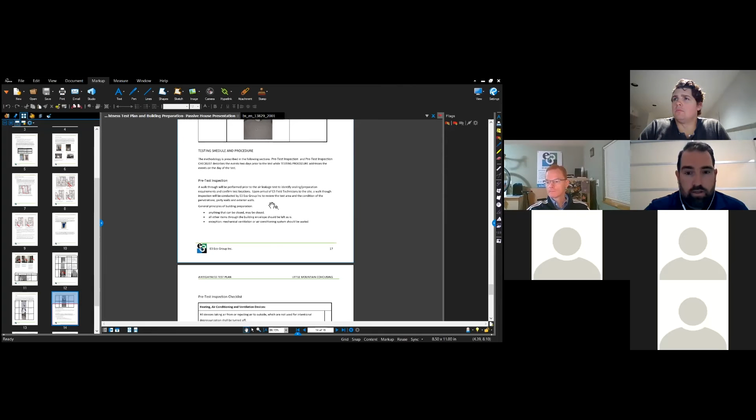part of this testing documentation, we give a quick little checklist here that the construction staff can use to go through, as well as all the site-specific photographs. And that's typically it. Ina, is there anything else that you'd like to add in that I might have glazed over there? No, I think you caught everything.

The main takeaway that we've certainly learned over the years is it is a lot of prep work. And it's important to realize what you're getting yourself into when you look at this testing. As Travis said, the actual process of running the test is very short. All going well, it's only going to take a couple of hours to run the test and get the numbers, but it's hours and hours, and in fact days, over a couple or more months, where you have to start getting prepared, do at least a couple site visits, collect the mechanical drawing information, and have discussions with the site super to get all these things lined up. So it is a surprising amount of prep work in order to have a relatively quick and successful test.

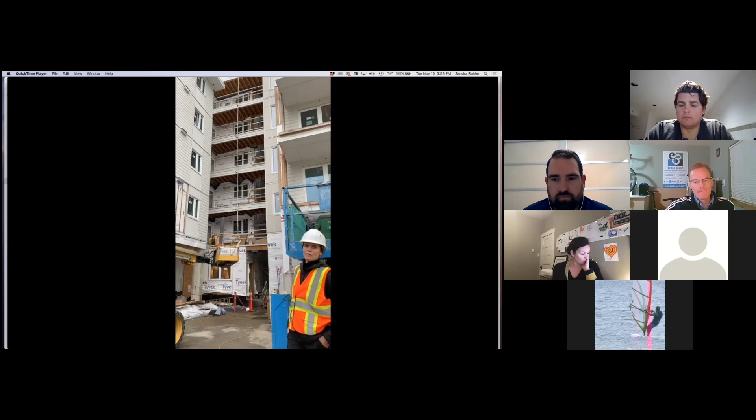Hey, Chris, sorry. Thanks for doing this again. Just a quick question that I wrote in the chat. Is there a rule of thumb for air testing multifamily buildings, or does it depend entirely on building typology, number of stories, etc.?

I would say it's always the same basic principle. There will be differences depending on the testing standard. So there's differences, even in the volume of conditioned space, between passive house and other testing standards. Some testing standards require both pressurization and depressurization. Some require just one. Some require different maximum levels of depressurization or pressurization. And not so much on the Part 3 building side, but on the Part 9 building side, there can be even differences with how you prepare the building.

So probably the first rule of thumb is to be very, very clear what are the intricacies of the particular standard that is supposed to apply to testing that particular building. That's probably the main thing, and that's confusing enough. So if you can survive that, that'll go a long way towards understanding how the building should be prepped and how it should be tested.